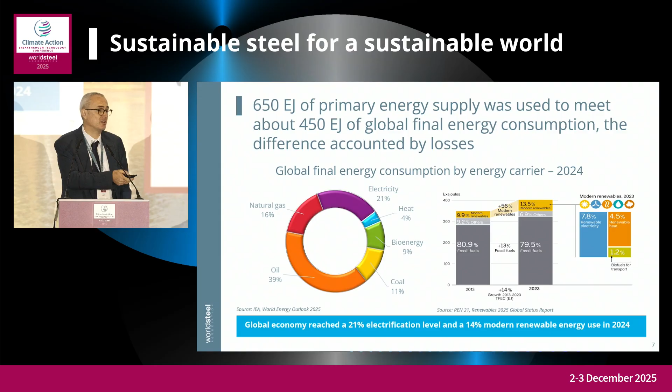This pie chart shows the energy carrier breakdown for final energy consumption of 450 exajoules. You can see electricity and heat here because some fuels were converted to these forms of energy. Electricity represented 21% of the total - the global energy system had an electrification level of 21%. This is where we are in our decarbonization journey. The chart on the right shows that 14% of global final energy demand was met by renewable sources. So, 21% electrification and 14% renewable energy for our global final energy consumption - this is where we are in our decarbonization journey.

Zooming in on consumption, energy use can be grouped broadly into three big groups. Industry is the biggest, accounting for 40% of the total, including the use of fossil fuel as feedstock. Then we have buildings and transportation, each accounting for about 30%, and the rest, about 5%, is energy demand from agricultural activities, fishing, and so on.

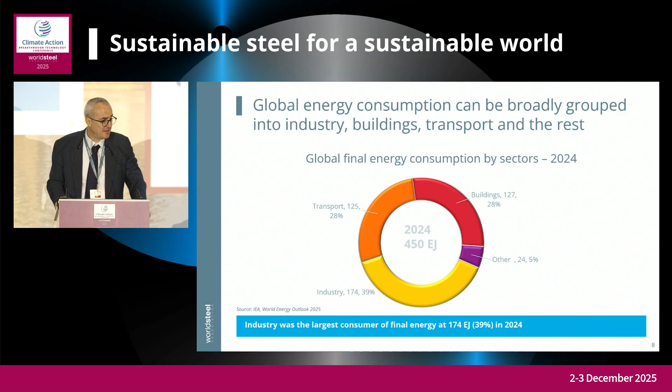Let's now zoom in on the energy mix for each of these big energy-using blocks: transportation on the right-hand side, buildings in the middle, and industry on the left-hand side of this slide. Starting with transportation, you can see it was dependent on oil, this big orange part of the pie chart, at a level of 90%.

This is despite the very rapid electrification of passenger vehicle sales, so we should be at around 20-25% of global sales nowadays. Transportation is still dependent on oil.

Buildings in the middle show the highest electrification level, at 40% of the energy mix for buildings energy consumption, and the lowest fossil fuel dependence. If I sum these up quickly: 23%, 10%, 2%, so 35% only fossil fuel dependence. That's the lowest among the three blocks.

And industry, we see an electricity share of 23% and a fossil fuel share of about 63%. So here I'd like to bring your attention to buildings, why we have this very high share, or the highest share, of electricity and lowest fossil fuel dependence.

That reflects the ease of electrification of energy use cases in buildings: cooling, heating, cooking, and powering up appliances. These are easy to electrify, hence the high share of electrification of energy use in buildings.

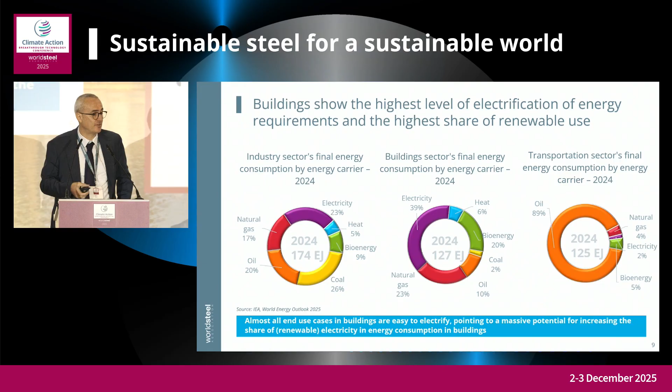Let's now zoom in on the energy use of industry. You can see here the major industrial energy users, the so-called hard-to-abate sectors. Chemicals, iron and steel, and cement together account for about 60% of global industrial energy use.

Hard-to-abate sectors are heavy industries which are really energy intensive, and their sheer volume, sheer output, means that these are the biggest energy users.

And in the rest, which represents about 40-45% of global industrial energy use, we have mainly manufactured goods sectors: vehicles, appliances, textiles, foods, and all of these.

Hard-to-abate sectors, why are they hard to abate? We all know very well. First of all, these sectors require very high heat applications, which are very difficult to electrify. Moreover, they use carbon-containing materials as feedstock.

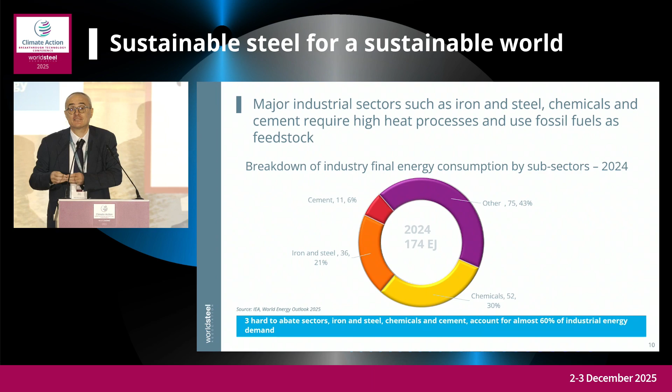In contrast, manufactured goods sectors mostly use low to medium heat processes, and they are much easier to electrify.

I'll conclude this part by going through the energy mix for these important energy users: iron and steel, then cement and chemicals, the three hard-to-abate sectors, and manufactured goods, which are the easier part to decarbonize in industry. Looking at iron and steel, we see that we are consuming every year about 35 to 40 exajoules of energy.

That's about 7-8% of the global total final energy demand. And 75% of that comes from coal, the big black block.

Actually, the rest is mostly natural gas and electricity, but if you also take into account that the electricity we use, the direct heat we use, also comes mainly from fossil fuel sources, then directly and indirectly our industry is dependent maybe up to a level of 85-90% on fossil fuels at the moment.

When we turn to the energy mix for other sectors, we also see very high coal dependence for cement and a relatively high share of electricity for manufactured goods sectors.

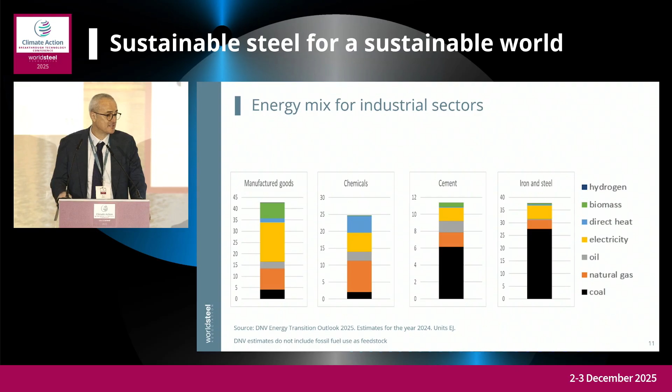Let's now move on to the outlook for global energy demand and supply. By now we are quite familiar with energy demand and supply projections, the most renowned being the IEA projections. But many of these start with a target, the Paris Agreement objective of keeping global warming below 1.5 degrees, or net zero at 2050 or 2060. They start with a target and then assume the changes needed to meet it happen at lightning speed, ignoring real-life constraints. So they show what must happen to meet a target, not what is likely to happen. For today's purposes, we cannot take those projections into account.

Instead, we will use the projection set provided by the 9th release of the Energy Transition Outlook made by a company called DNV. This is a Norwegian company operating in the assurance and risk management space, mainly in the energy area. Because developing a clear understanding of the future of energy is important to them, they work out these projections and provide them every year. We believe these projections come from an independent source, they take into account real-life constraints, and all of their data and assumptions are publicly available.

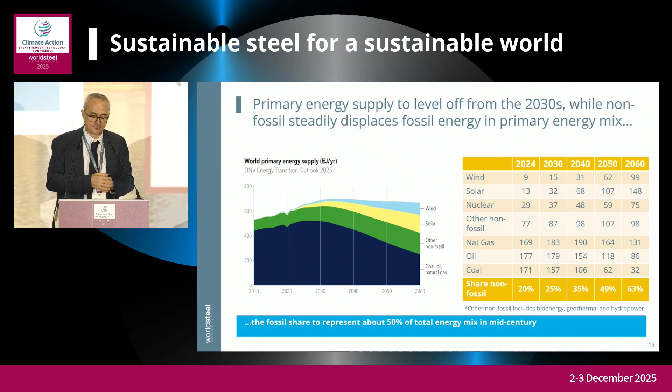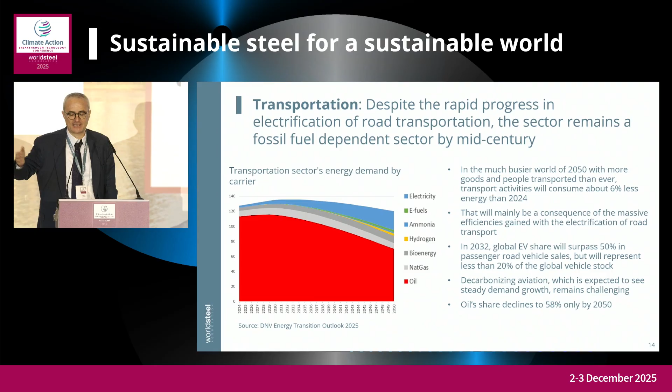Buildings: here we see steady growth in energy demand, reflecting the expectation for steady growth in global population becoming wealthier, and so on. Compared to 2024, the 2050 figure is 30% higher.

We've mentioned buildings have the highest share of electricity in their energy mix, about 40% nowadays, expected to grow only up to 50%. Again, the amount of electricity used by buildings is expected to grow very strongly, but not only up to 2050, also beyond 2050 for several decades. So the point I'm trying to make is that when we look at the consumption side, the message is that low carbon energy availability, particularly low carbon electricity availability, might remain scarce for the foreseeable future.

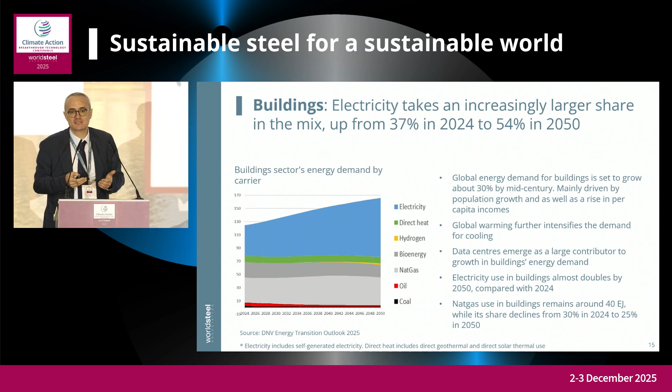But let's move on and look at industry. The total demand for energy coming from the global industry sector is expected to show only weak growth, reflecting assumptions for substantial efficiency gains and increasing use of recycled materials.

When we look at the share of coal, the black part, it starts coming down steadily, but slower than the pace we see for other sectors like transportation and buildings. We also see the blue part, the share of electricity, growing steadily, but again at a somewhat slower pace compared with the other two sectors. So overall we're seeing a slower decarbonization pace for industry, but this isn't surprising.

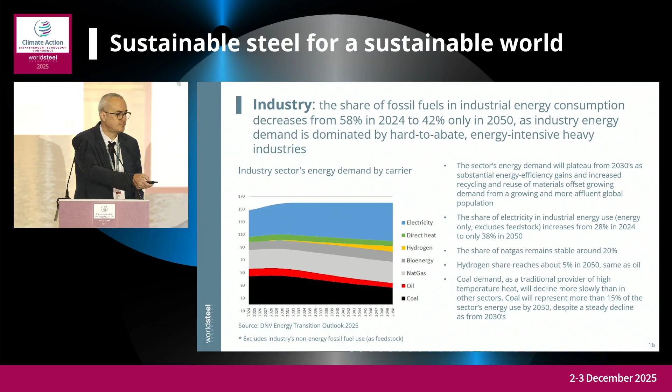Looking in more detail at the iron and steel sector, the two basic assumptions are that global steel demand will grow by 10% and reach a peak level around the mid-2030s. The share of electric furnaces in global steel production will grow up to 50% by 2050, as EAFs are more energy efficient than BF-BOFs. This means that globally, iron and steel making, although demand will be higher, will require significantly less energy. Compared to 2024, the 2050 total energy consumption is about 33 exajoules.

It's like 15% lower, if I'm not wrong. And when we look at the share of coal, we see it's coming down significantly from about 75% nowadays to around 56%, if I'm not wrong. Share of electricity growing, and interestingly, share of hydrogen reaching almost 15% by 2050.

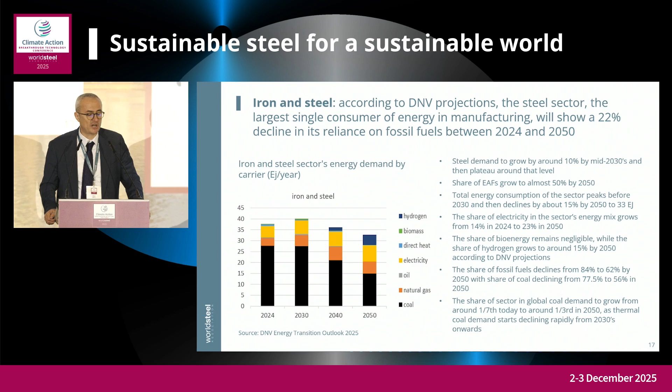This is a strong assumption, as several speakers already pointed out the difficulties and delays in plans. But something in line with these observations, we see hydrogen, this dark blue part on top, showing the scale-up stage only in the 2040s, not the 2030s, which matches what we see on the ground with postponements of several hydrogen steelmaking projects. So all in all, significant progress, this projection suggesting, but also quite far from being comprehensive.

We've pointed to the necessity for, or the expectation that decarbonization will follow different routes in different parts of the world, reflecting the differences in operating environment characteristics.

I just want to say this is nothing new. If you look at the chart on the left-hand side of the slide, showing the share of EAFs in different parts of the world starting from 1980, you can see Japan, North America, China, EU at about 25% level, at very close levels back in 1980. And look at where they are now, how different the evolution of steelmaking technology has been in these different parts of the world.

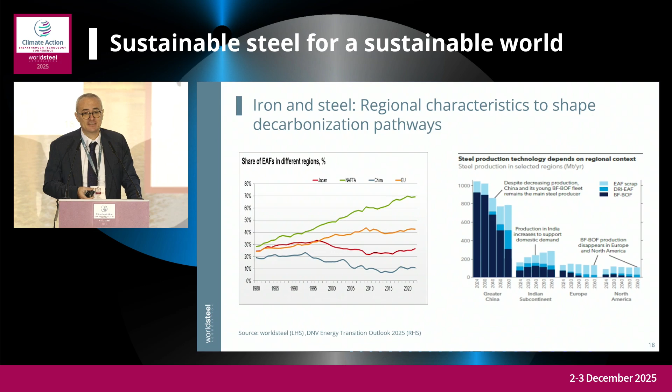And if we focus on Japan, North America, and EU, they share one common characteristic: these are scrap surplus regions. They are net exporters of scrap, but in terms of energy availability and some other characteristics, they have big differences, we know. But already, when we look at the evolution of steel production technology from 1980 at major steel producing regions, we already see different approaches, and this is likely to be the case also under decarbonization pressures.

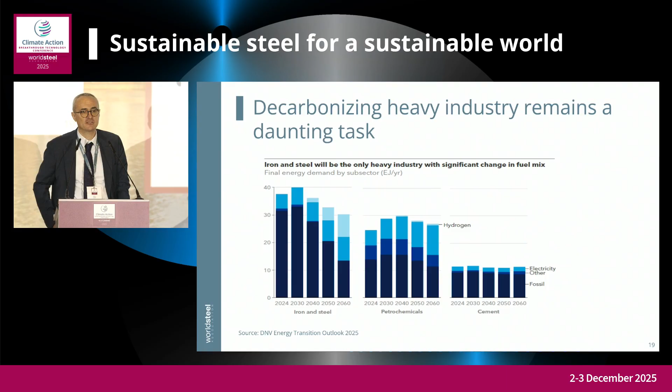One interesting observation coming from the DNV work, when we compare their projections across hard-to-abate sectors, iron and steel, petrochemicals and cement, steel is the one expected to show the fastest progress. You can see their projections for iron and steel on the left-hand side, a significant decline, and here now we have 2060 as well, in the share of coal, the bottom part, or the share of fossil fuels. But for petrochemicals and cement, there is only a marginal decline in their dependence on fossil fuels. This was an interesting observation.

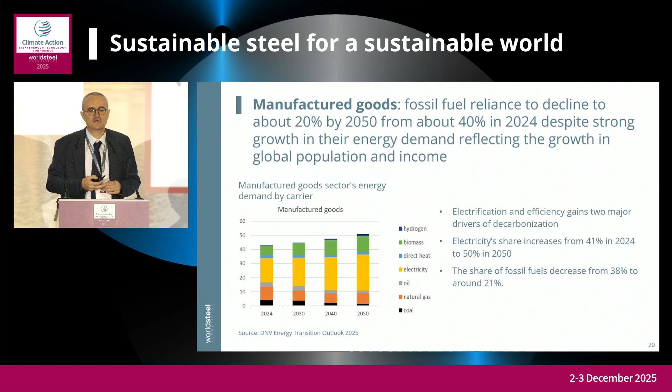Manufactured goods are much easier to electrify. Here we see the energy mix projections. First of all, we observe a significant growth in overall demand, reflecting the expectation of global population growth and population becoming more affluent. But we also see the share of electricity increasing, though still reaching a level of around 50, maybe 55%. So again, similar to transportation and buildings, manufactured goods sectors will continue to demand growing amounts of low carbon electricity, also for several decades beyond 2050.

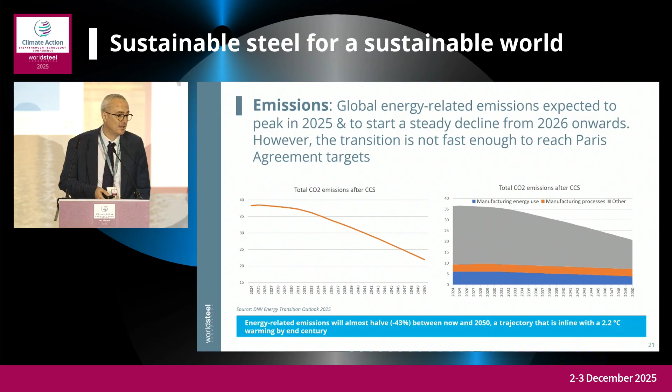The bottom two shades show the total emissions coming from industry. The gray shade shows the emissions coming from the rest of the global economy. So we see the emissions coming from other sectors come down much more rapidly compared with manufacturing, despite the steady progress expected to be seen in decarbonization of the manufacturing sectors.

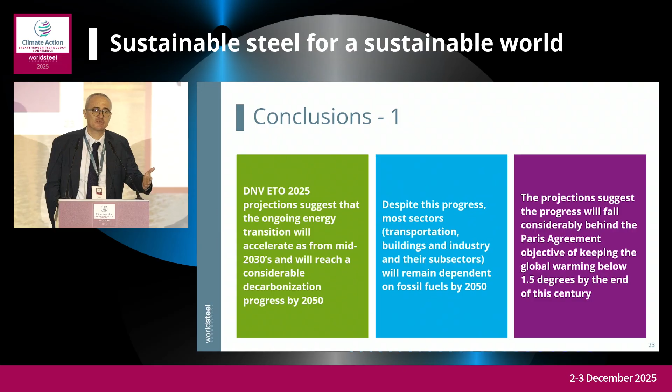So quickly summarizing the main findings coming from this analysis. First, decarbonization, the green transition of the world economy and global energy systems, will accelerate as from the 2030s. Second, despite this accelerated progress, despite the significant progress that humanity is expected to show by 2050, this will be far away from being a comprehensive decarbonization.

This will be significantly slower than the Paris Agreement objective. Low carbon energy availability, when we look at both the supply side and the demand side, we are seeing very strong signs that the world will remain a place where low carbon energy, particularly low carbon electricity, is scarce. By 2050, almost all end-use cases, and many of these will be easier to electrify compared with hard-to-abate sectors, will be showing growing demand for low carbon energy, particularly low carbon electricity.

And also interestingly, if it comes to the allocation of this energy, there is the possibility that these other sectors which are easier to decarbonize might be prioritized. Simply, they might have higher capability in terms of affordability, in terms of access to energy, but also in terms of the infrastructure requirements of the global energy system, in terms of the ability to connect renewable energy sources to the demand centers and to manage the volatility of the renewable energy sources.

So this concludes my presentation. Thank you so much for your attention.

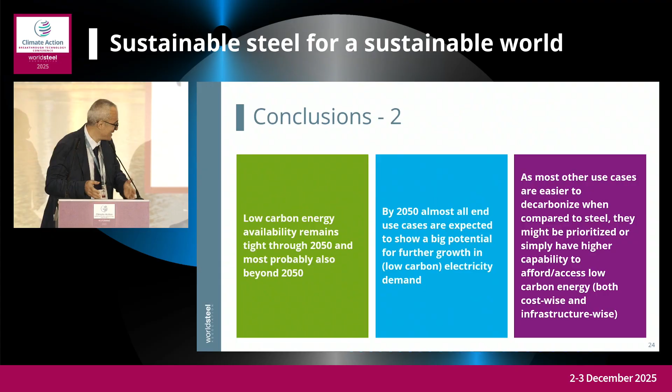It's a pleasure for us to come here and debate with you about what we can do to fight global warming. Even sitting here in this room, I was hoping a little bit of local warming wouldn't be so bad. It's cold in here.

Let's start with my talk, giving you a little insight into how we tackle the developments taking place around this decarbonization topic. We've heard already that the number of technical solutions is steadily increasing, with new combinations of known processes and new processes under development, all contributing without doubt to the target of decarbonizing steelmaking.

But the variety of solutions is creating problems. If I put myself in the shoes of our customers, what are the right selections, the right decisions to take in order to assure steel production for the future, respecting decarbonization goals and also economic targets? We live in a world where decarbonization is not happening in parallel—there are different speeds in different markets, and the market is global, so we have to compete.

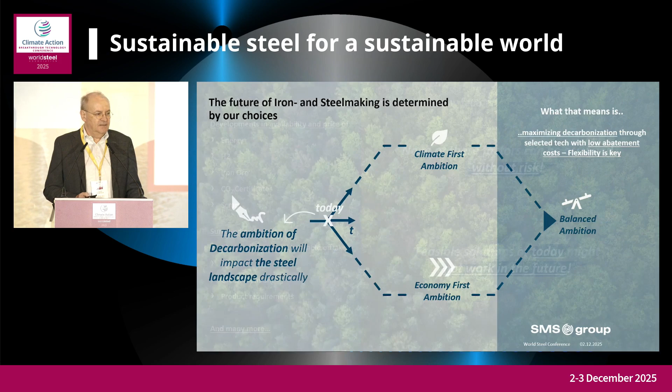That sounds simple, but real life is complex, as we've heard in several talks this morning. Unfortunately, the world gets more complex the further we step into decarbonization, because other elements are impacting our steel production.

Energy is the topic of this session. Energy means electricity and natural gas. If you look at what happened over the last years in energy price development, it was beyond past experience, making it more complicated to predict the right choice for our technology.

Hydrogen we've talked about a lot. When I first started attending this conference, it was the first topic mentioned—the trust that hydrogen can be the right solution to decarbonize industry. But we are desperately looking for this hydrogen because production is expensive, we're lagging behind in time, and availability isn't given.

Hydrogen was the motor and accelerator for all the decisions taken in the European steel industry to invest heavily in new facilities, all aimed at using hydrogen. But nobody knows today when it will be available in the quantity and price that will allow steel production.

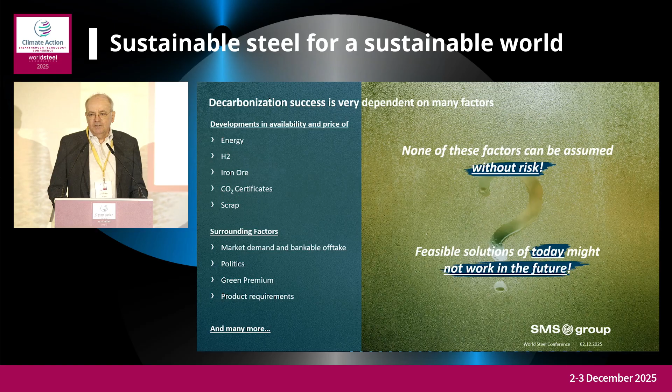This is not only a question for steel producers, it's also a question for us as a plant builder and solution developer, because the question is where are we heading to, what is really missing, and where should we invest in order to find solutions that fit the needs of the future and open options that today are not there.

In order to, as good engineers, try to rationalize this discussion, we have, together with our green steel team, developed an assessment tool that tries to give a more objective view on what is or might be the right way for the future, integrating the CO2 impact of the different technologies, looking into comparisons of technologies, doing OPEX analysis.

I think that's something we wanted to analyze: which technologies under which circumstances guarantee the lowest OPEX per ton of liquid steel for the steel producers, because automatically this is the most interesting one.

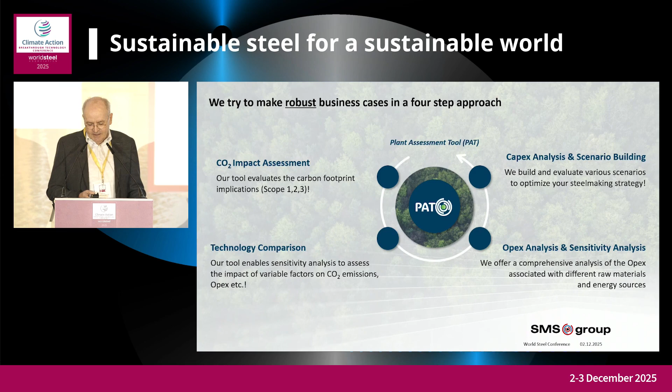And of course, last but not least, as we are a plant builder, we also have something to say on this topic of CapEx. I think that is the last puzzle piece that has to be fit in order to make a complete assessment.

I just want to give you an example here of how this kind of analysis may look like. We are offering this as a service for you, in collaboration with you, to see under specific local conditions, which are different in India than in Australia and different than in Europe, what might be the right choice for the future.

Here in this example, for different technologies, EASyMelt. Some words about EASyMelt: what is it? This is our answer to the question, how should the blast furnace of the future look like?

The EASyMelt name stands for something philosophically higher and important: it means electrically assisted syngas smelter. So what we want to do is convert the blast furnace into something different, where you no longer put blast, meaning hot air, in. This is why the name is changing. And this is one way to produce liquid pig iron in the future.

Then, of course, you have the combinations of direct reduction with the classical way, with the electric arc furnace, or the new way, the smelter way, which we are building in Germany, at Thyssen. And the last topic, which is interesting and might have potential for the future, is fine ore reduction. CFB stands for circulating fluidized bed.

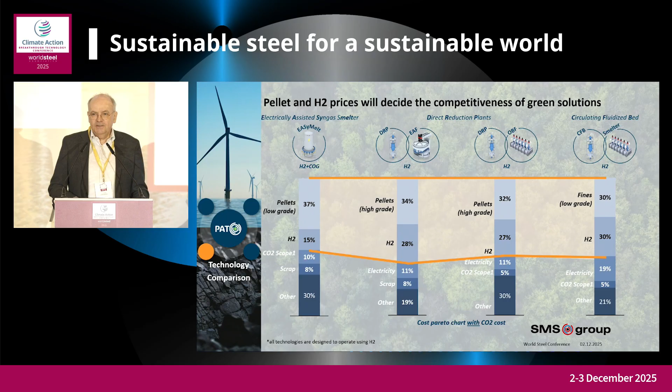So all this is in the model, but I wanted to pick out the most important one: hydrogen in combination with steel production for the future. The question was, for these different processes, how does this impact things? Let's look now into how it looks like.

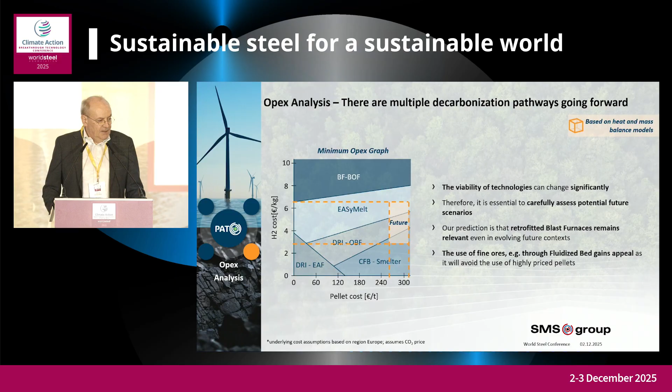And if you make the next step and change the energy cost—meaning electricity in that case—the picture changes again. If you lower the energy costs, more and more the high electricity consuming process becomes interesting. And if the cost goes up, you see that our EASyMelt technology becomes more interesting because it consumes less electrical energy than the other ways.

So all this means you have to look carefully into the selection of technologies, and it is not so easy to anticipate how these cost-driving elements will develop in the future, and what is the most flexible solution you can think of in order to be sure that also in 5-10 years you're able to sell the steel you're producing. This is an example, and we've already exercised this with several steel producers in order to adapt this kind of scenario analysis for local conditions. And again, it depends—it's different in Japan than in Korea and than in India.

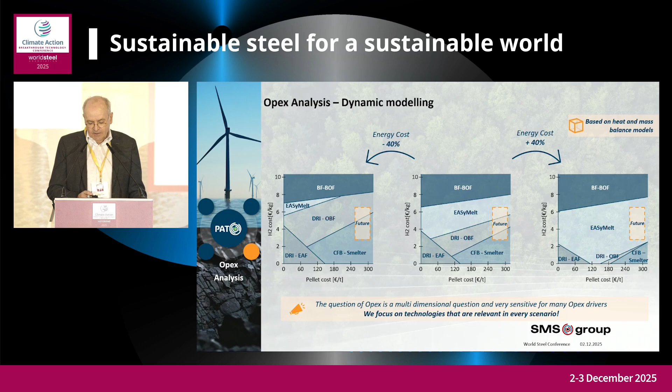So we are offering this as a service to help find a way. It was also an analysis we did for ourselves in order to see where there are technologies interesting for us to develop. You can see out of these graphs that EASyMelt is one of the most important things, and also the combination of fine ore reduction, fluidized bed with a smelter is another one. Some words on these both technologies.

EASyMelt—Jochen Burg already mentioned this morning, after signing an MOU with Tata Steel about a year and a half back, that this joint project has now passed the board of Tata and will be realized. Tata Steel will give us the blast furnace E in Jamshedpur, and together we will convert that into the first modified blast furnace. It's a small one, I think a 600 cubic meter blast furnace, but we want to realize the technology and see the real impact on the operation of such a modified blast furnace.

We want to see how our concept of injection of synthetic gases impacts not only CO2 emissions, but also the operation of the blast furnace.

And this is an intermediate step to then, with the experience gained, go into the next level of more adult, big-size blast furnaces. That is still a different step to be done.

Fluidized bed, I think that's for the reason that the fine ores that are available and not marketable are an interesting source for the production of iron. Fine ore reduction with hydrogen is a topic.

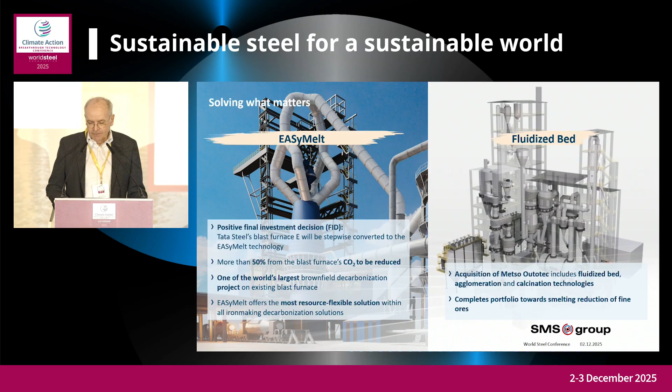And of course, if we accept that integrated steelmaking will exist, may it be 30 or 50% in the future, we still need sinter plants, we still need pellet plants, and also we have to decarbonize this process step as much as possible. We are looking into this together with the new colleagues that are coming from Metso Outotec into SMS.

To summarize now, I think the world is getting more complex than it was before, and we try to approach that problem by doing classical analysis in order to give guidelines and help and assistance to make the right choices and selections.

Of course, I mentioned that the CAPEX topic is one on top, so it's not only OPEX, but also CAPEX. And also here you can see that different process ways have huge differences in investment. And all these together may lead to wise decisions on how to save steel production and to guarantee sustainable production for the future.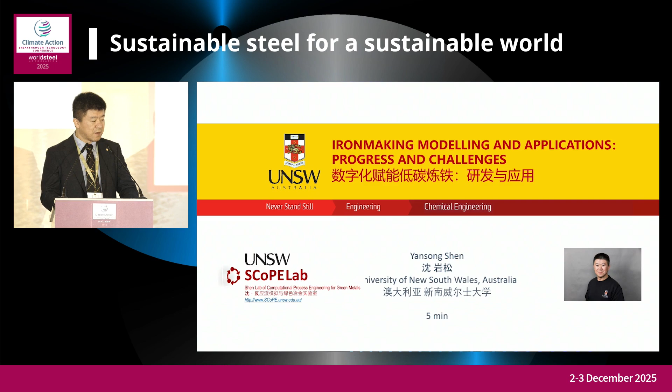So right now I'm running a research lab called SHEN Lab of Computational Process Engineering for the green metals. And right, so a very quick overview about our R&D on green iron.

So basically right now we have around 40 PhD and postdoc fellows, and we have 2 senior advisors from the industry, like Professor John Mathieson and Professor Sharif Jahanshahi. And right now we receive a lot of funding from the industry and from the Australian government to conduct many industry-related research and also some independent research.

And we have been working together with the industry for many, many years. As you can see from here, the first example, Baowu, since 2011, we have been working with them on 4 3-year projects, and working with BlueScope Steel since 2004, and ArcelorMittal just from last year, and then Rio Tinto since 2012, and BHP since 2016.

Yes, as a university researcher, we publish a lot in this area on Ironmaking and steelmaking, and we work together with Ironmaking industry partners in these publications.

As you can see in this diagram, we have around 40 people, and around 15 people are working on blast furnace, Ironmaking and Ironmaking decarbonization, and 5 people are working on the electro smelting furnace, and 4 people are working on basic oxygen furnace, and 5 people on EAF, and 5 people are working on DRI for the ESF, and 5 people are working on fluidization, flash smelting, and other emerging Ironmaking technologies.

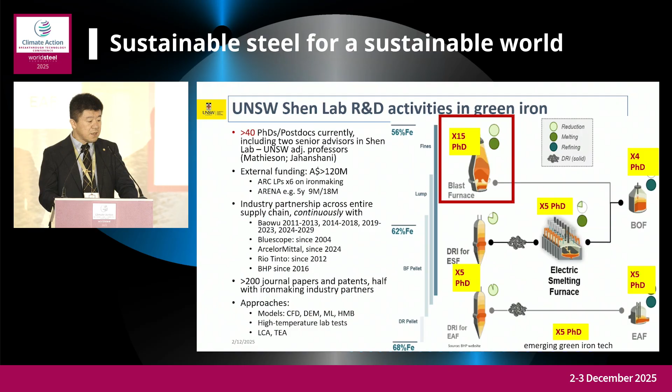The first one will be the blast furnace technology project we are running right now. We give a new name for this blast furnace technology, called RISB. It's short for, as you can see, right-hand side burden distribution, sustainable burdens, together with renewable injections at the bottom. So this is the short name, RISB.

From my view, blast furnace will be there for tens of years, and we still need to use a blast furnace to achieve the so-called decarbonization targets. Although we have many emerging technologies, we may still need to rely on blast furnace to produce low-cost products.

We have been talking about decarbonization in recent years, but my view is decarbonization is one side of the coin. We also need to look at the other side of the coin, which is low-cost operation. In recent discussions and reports, we usually ignore this part, and this may be too ideal but a bit far from the real world.

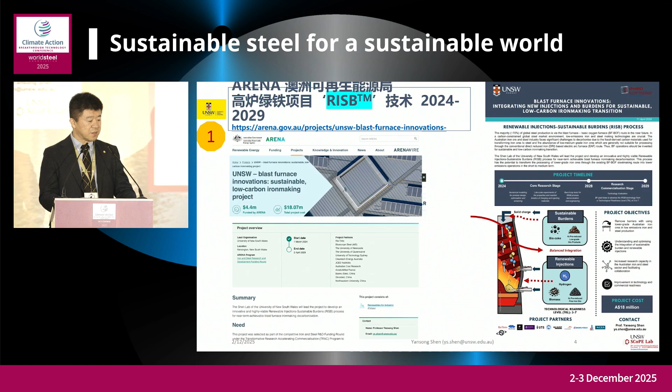In this project we generated one patent - another example of how to use hydrogen in the blast furnace. We are one of the first research groups to study hydrogen injection. You can see after we inject hydrogen, the raceway shape and size will be crazy, so we need to be careful when using hydrogen injection.

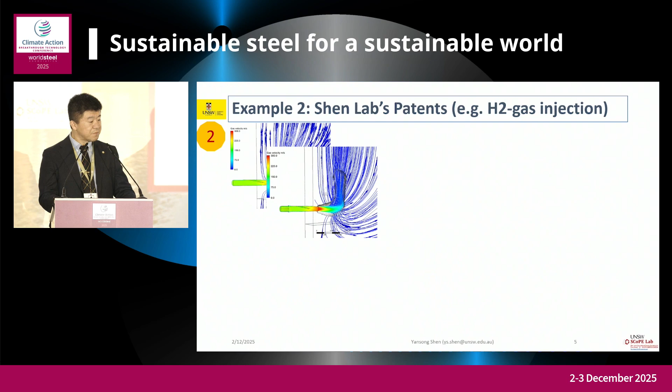In that case, the HMB model is one method, but not enough - we should use a CFD method too. HMB can give us some ideas: on the left-hand side is the operating window if we just use hydrogen injection, but the right-hand side is the operating window if we use hydrogen together with coal. You can see hydrogen together with coal has a larger operating window, meaning higher furnace stability.

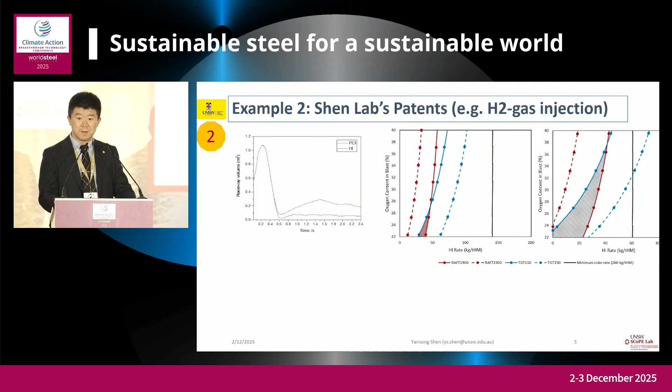But coal has a dirty name - people do not want to use coal. So we have a patent for co-injection combining hydrogen together with biomass. This way we can save around 20% carbon dioxide. All right, let's see these two examples of the technologies.

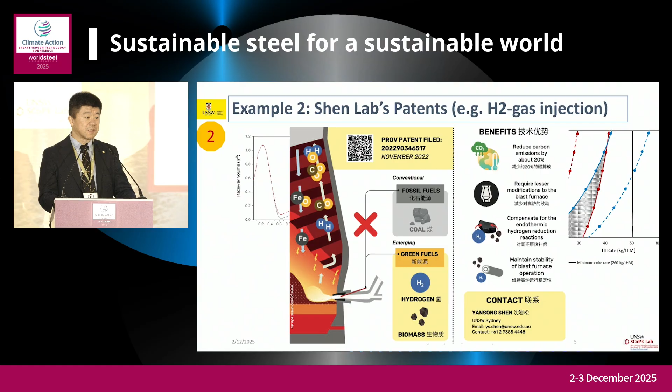Now let's talk about something more scientific, more academic - one of the methods we are most proud of, which is blast furnace modeling.

The first part will be raceway modeling. We started from 2008, back then starting from the steady state at the pilot scale furnace, and we published quite a few papers representing this work. This model is very robust, and then we evolved this model from pilot scale to blast furnace scale, using it to study new technologies and also conventional technology optimization understanding.

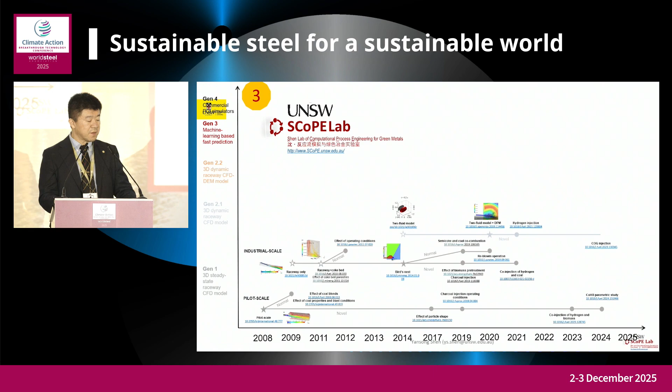Later on, we evolved this model from the first generation steady state to the second generation, which is unsteady state. Then we could see the raceway shape and size, which is very important for hydrogen injection operation. We then used a CFD-DEM method to capture particle scale information. The third generation uses machine learning to capture the raceway shape and size in just a few minutes.

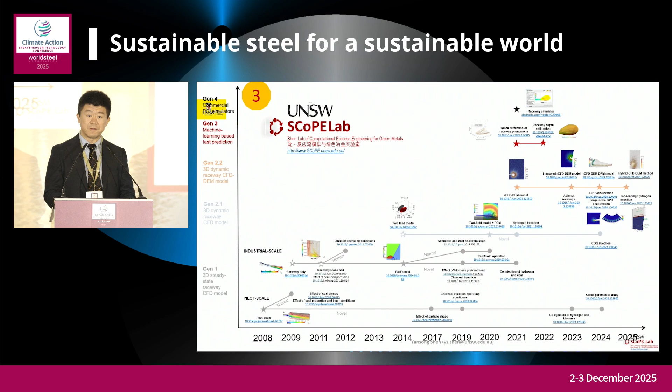So in summary: the first generation could study coal and biochar operation, but only for the steady state. The second generation model could study not just coal but also hydrogen injection, allowing us to study the impact of hydrogen injection not just on coal combustion but also on raceway shape and size. The third generation uses machine learning to predict raceway shape and size and co-combustion in just several minutes, which is about 500 times faster than the CFD method.

All right, so that's the first one. The second one is also a summary of our blast furnace models - this one is the whole blast furnace model. When we look at the whole blast furnace, we are all experts in this field, so we understand blast furnace is first a transient state process, second a 3D reactor.

Third, it is a layer structure operation, and we also need to capture the cohesive zone and all the in-furnace phenomena. All right, so these are the challenges we need to capture.

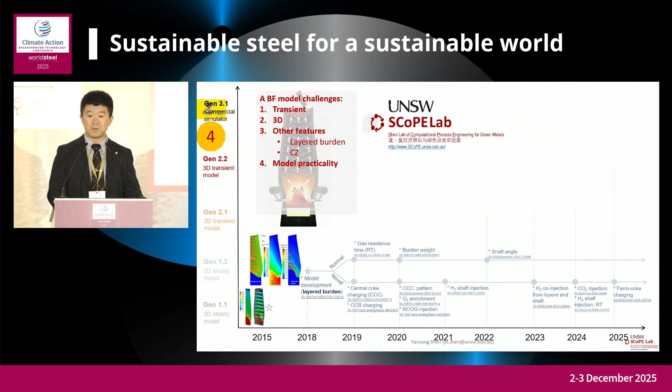Back to 2015, we started from the first generation steady state blast furnace model, which was a 3D version. I give it a hollow star because after that we found this model was not so robust, so we didn't use it for subsequent studies. Instead, we rebuilt this model using in-house code rather than commercial code.

But we also further developed this model into the unsteady state blast furnace. Then we can see the time evolution of the internal states of the blast furnace, which is very important when we have to handle unexpected operations. We evolved this model from 2D to 3D, and lastly we have a software package for this purpose.

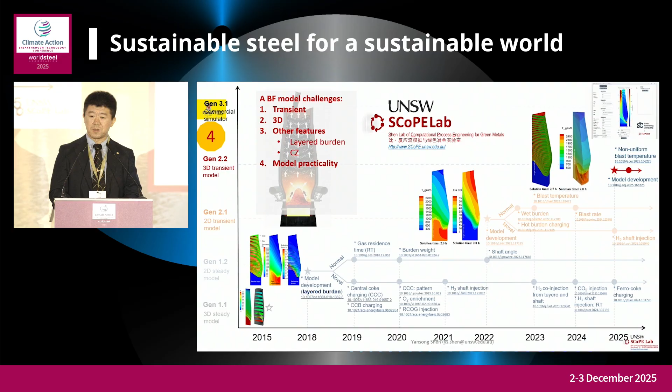So to summarize, the first generation blast furnace model is for the steady state internal state, the second generation is for the unsteady state, especially useful for unstable operation, and the third generation is for fast prediction.

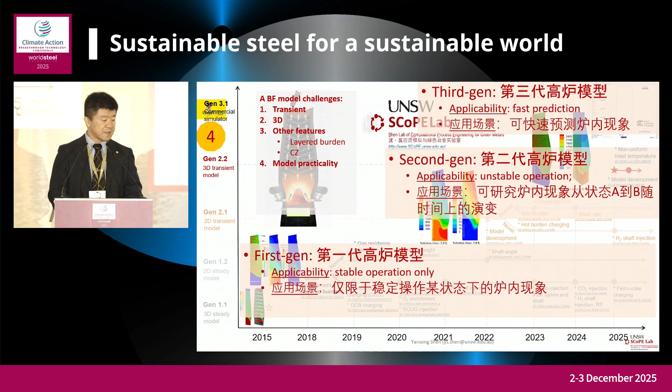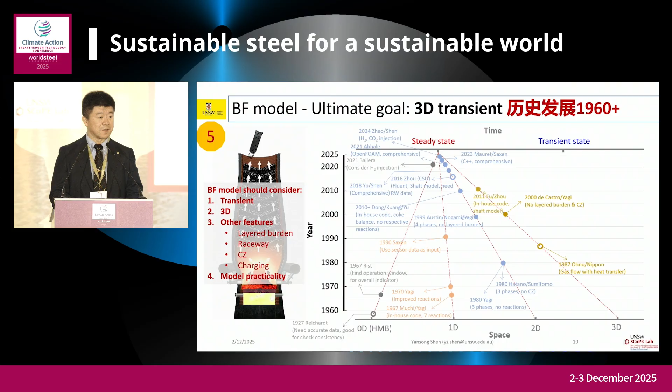So basically, for 0D steady state, you can see all these contributions, and 1D steady state, all these contributions, and 2D steady state, who is working in this area, and 3D steady state, who is working in these areas. Then for the transient state from 1D to 2D to 3D, who is working in this area.

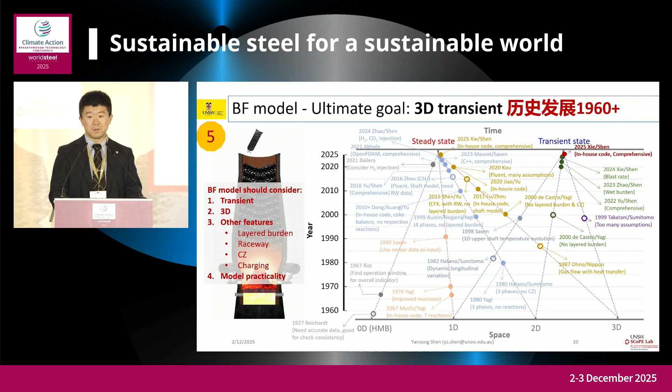So this diagram, this chart, can in the future help you use it as a reference. When you need to work with someone, when you need to find a useful model for your operation or your optimization, maybe you can find the suitable model for your project.